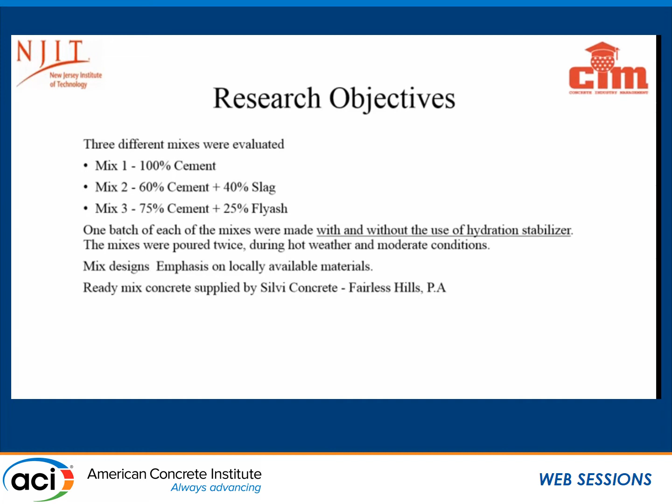So the design was based on locally available materials. Here you have a picture of the batching plant at Silvi. One of the reasons we chose to do a mix at the batching plant is that if we do an actual site mix, it'll give more credibility and more realistic results as opposed to doing a mixture inside of the lab.

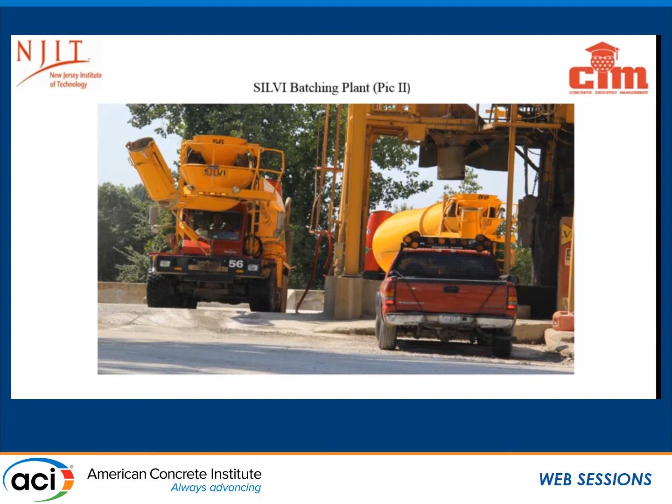A lab mix is always going to give you quote-unquote perfect results. Our interest is in what is going to happen in the field, because what happens in the field determines a lot, and the outcome of your concrete is what affects the concrete's performance. So we chose to do an actual field mix at an actual batch plant.

These are some of the tests that were done. We decided on doing timestamps of 60, 90, 120, 150, and 180 minutes to determine the effects and the performance of the concrete at those individual time frames.

Typical tests: slump, entrainment, temperature, compressive strength, flexural, permeability. In terms of the actual tests normally done on fresh concrete, we pretty much incorporated all of them so that we could have an array of results to present.

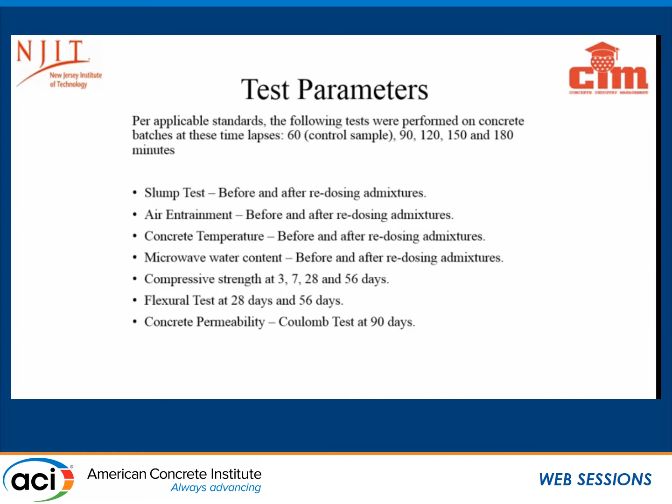Target properties, again, nothing strange or unfamiliar: 28-day compressive strength, which is industry standard, max aggregate size of 1 inch, target slump, target air, hot weather conditions, moderate weather conditions, and your typical specimen sizes - your 4x8 cylinders for compressive strength, your 6x6x18, and your 4x4x12 for flexural strength.

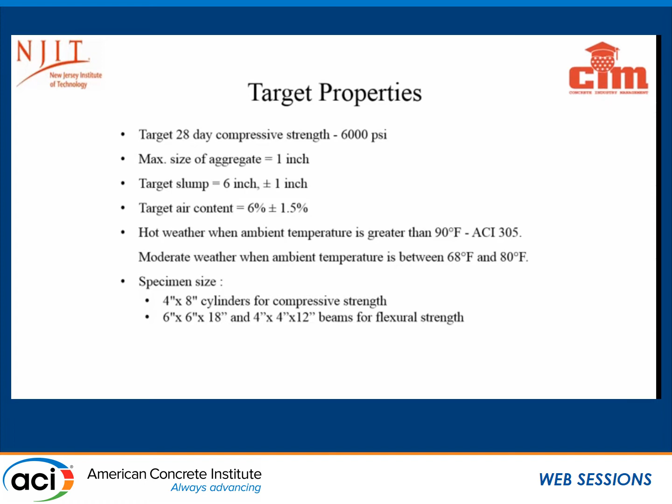Quality control, of course, is imperative. We made the determination very early that the only interference, the only adjustments we'll make, is with the high range water reducer and the air entrainment. No water addition whatsoever would go into these mixes, because if you add water, you change the water-cement ratio, and you could have further challenges that we want to minimize or avoid. We utilized quality control reps from the supplier, and Sika admixtures were on board with us, supplying representatives as well to provide guidance.

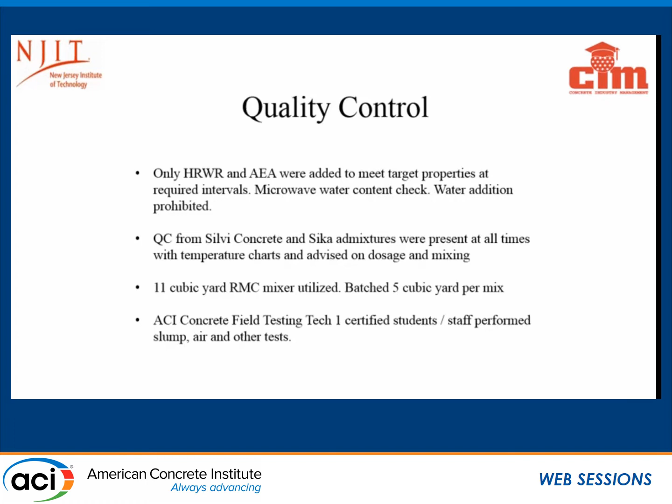Like I said, we used the actual ready-mix plant and actual ready-mix truck, because we wanted to make it as realistic as possible, so that it could be quite comparative. And of course, we used certified students and staff to perform the tests.

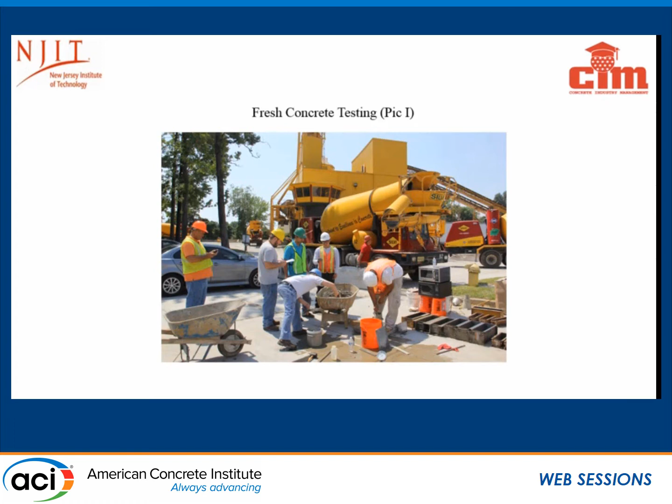Here we have the fresh concrete being tested - taking your samples, making your slump. You have your typical air pot, your temperature gauge - everything representative of what goes on site in terms of testing concrete. One of the things we did was a microwave test for moisture content.

So, the expected research outcome was pretty much to determine that there's no loss in performance of the mixes when going beyond 90 minutes. One of the things determined to be used was hydration stabilizer, because it has been proven that hydration stabilizers and retarders help the concrete perform in the intended way when going beyond 90 minutes.

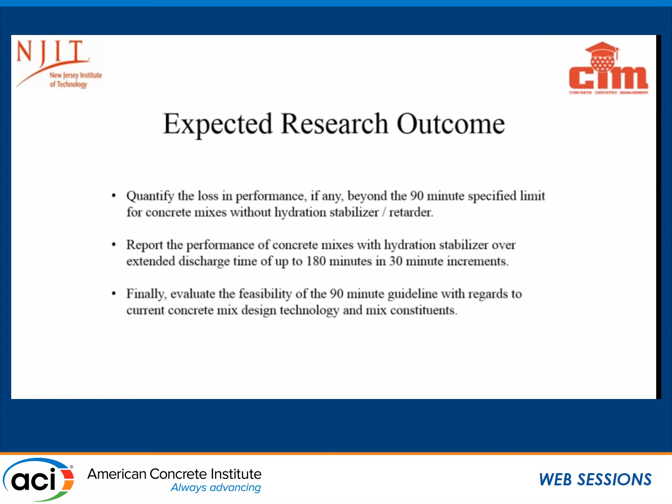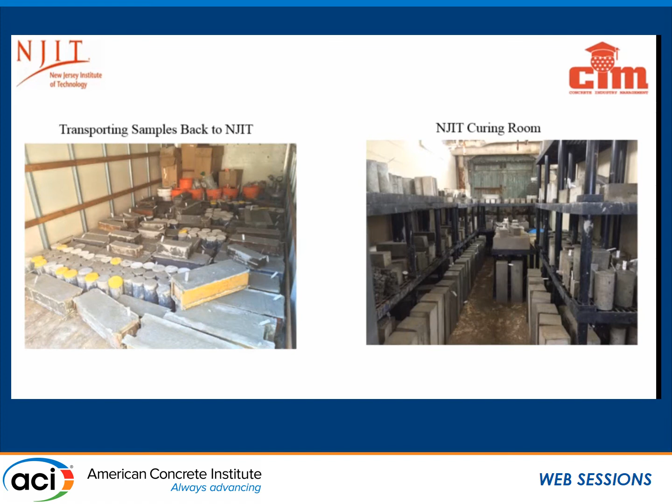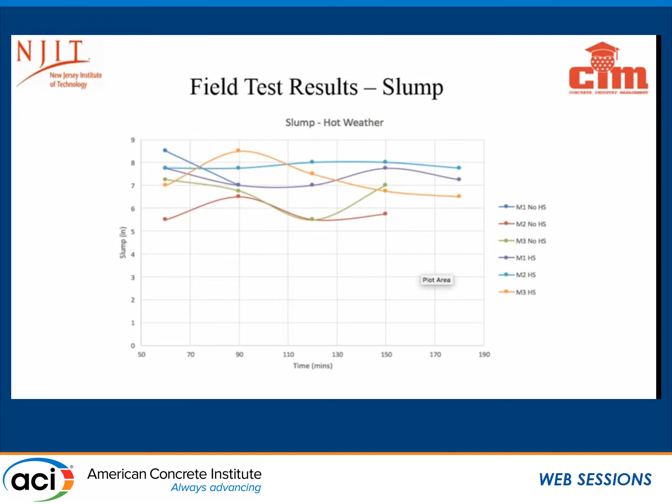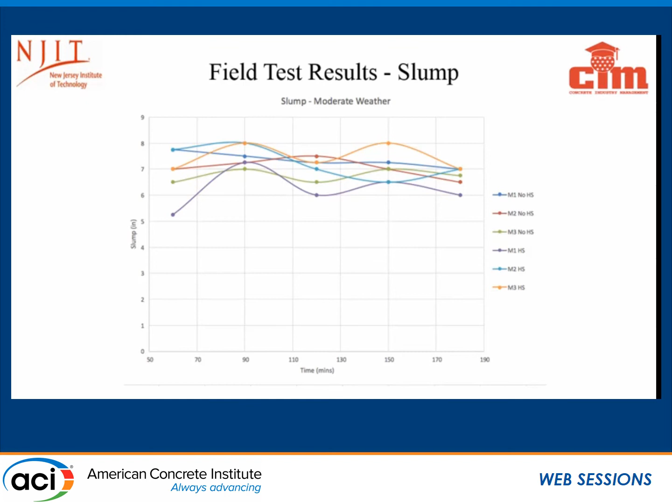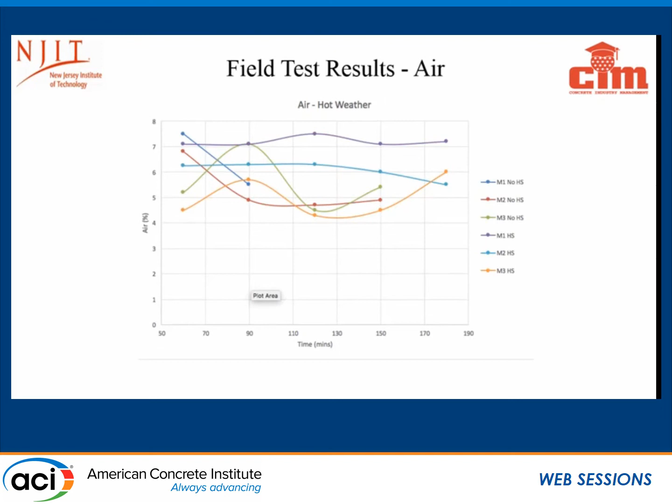Air is a major concern because as the mix is extended, you can have a loss in air. At each interval, when we tested the mix in 30 minutes, we checked slump and air. In some instances, we had to retemper with both the high-range water reducer and the air entrainment. But generally, the air was fairly consistent when you use hydration stabilizer. It's continued proof that utilizing admixtures is pretty much what's going to guarantee or assist you in achieving these results. Air entrainment during moderate weather is even more consistent compared to some of the mixes. It's a little erratic during hot weather, but in moderate weather it's more stable.

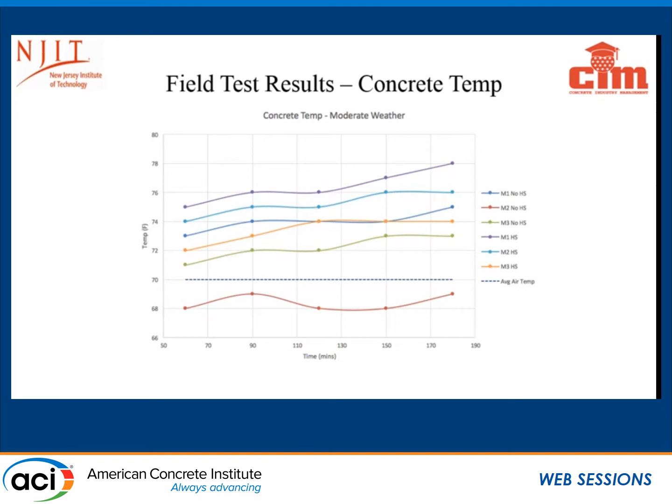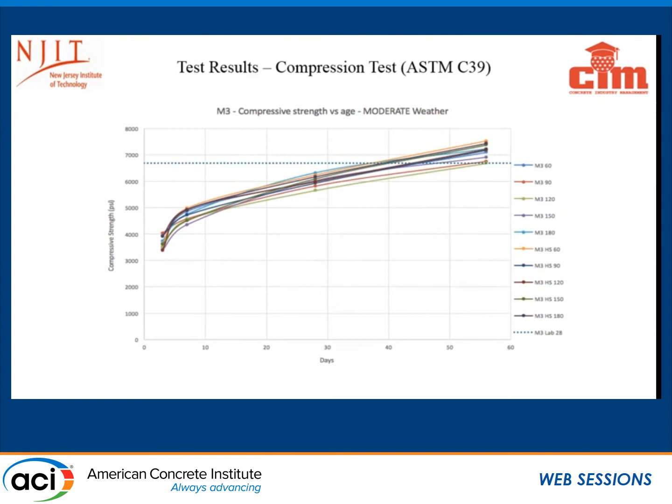Mix two, in moderate weather, you're still hitting your target. Mix three, in moderate weather, hitting your target.

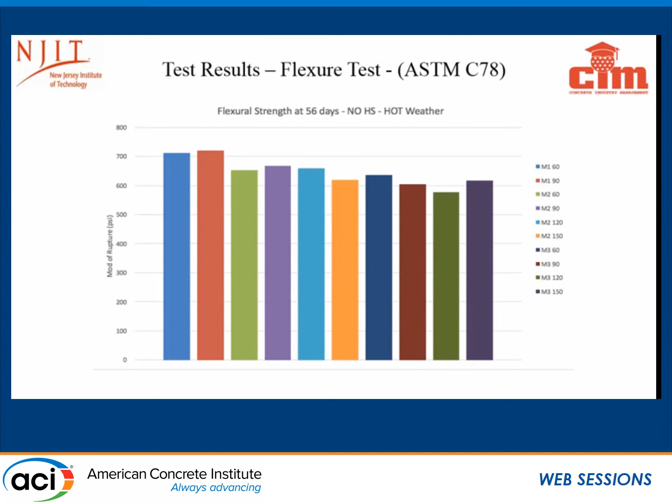One of the other tests done was flexural strength. I want to focus a little bit more on mix two. Mix two and mix three, the ones with fly ash and slag, show the most promise in terms of consistency and maintaining all the different characteristics that we're hoping for. So you have a range, mix two ranges from here, this one is a flexural test to here. You see it's fairly consistent over the testing period of 60 minutes down to 150 minutes.

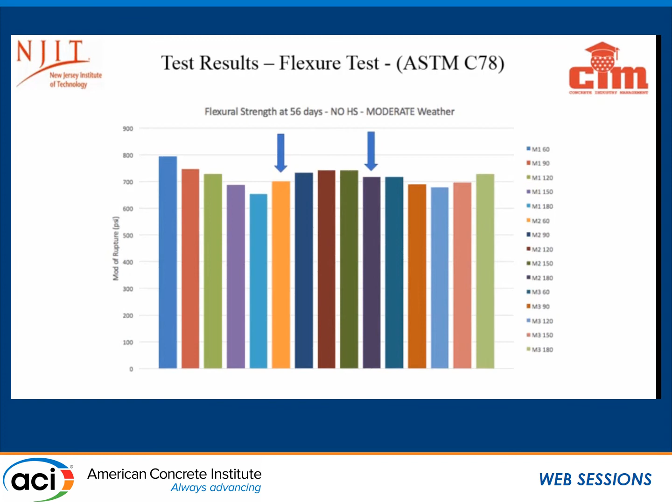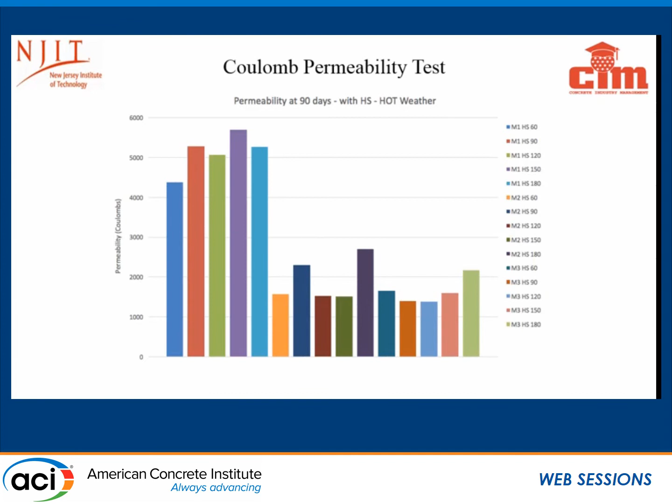You have your permeability test. As you can see, reduced permeability when you incorporate these supplemental cementitious materials. Same thing here, 90 days in hot weather with hydration stabilizer, you have the results between it. Again, fairly consistent. This one is 90 days in moderate weather with hydration stabilizer.

So that was the last of the charts. Now the summary of the findings: as expected, the summer pour's workability was not going to be as long as in moderate temperature. We pretty much had to redose with stabilizer and high-range water reducer at about every half an hour. In the case of the 100% Portland cement, we actually did it twice to get a more average result and to determine the effects again.

The slag and fly ash mixes were workable up to 150 minutes. The 100% cement was not so much - it started setting up much earlier. All of the mixes used our 60-minute sample as the control. The 100% cement was workable up to 100 minutes, after that it started setting off. The slag and fly ash were workable enough up to about 150 minutes.

And this was no water whatsoever - no water was added. What do you redose at here? High-range water reducer, Super P. The only addition we made to any of the mixes at any time were air entrainment admixture and Super P. I've got a question.

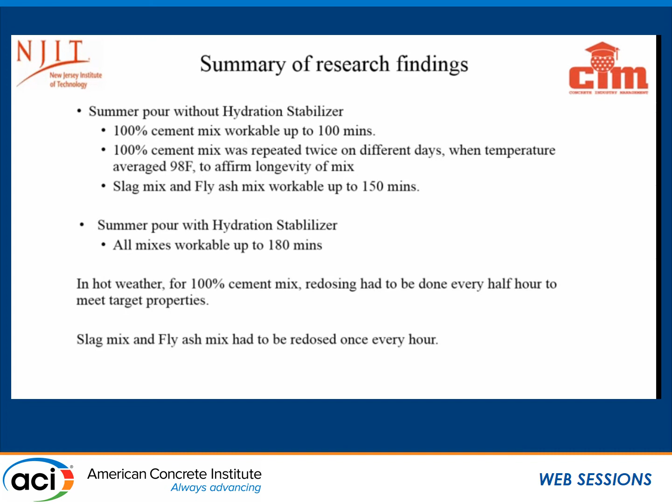This slide is a continuation of a summary of the findings. The fall pour without a hydration stabilizer, compared to during the summer, we were only able to get up to 100 minutes on the 100% OPC. We were able to get up to 180 minutes without hydration stabilizer in moderate weather. I don't know if that answers some of your questions.

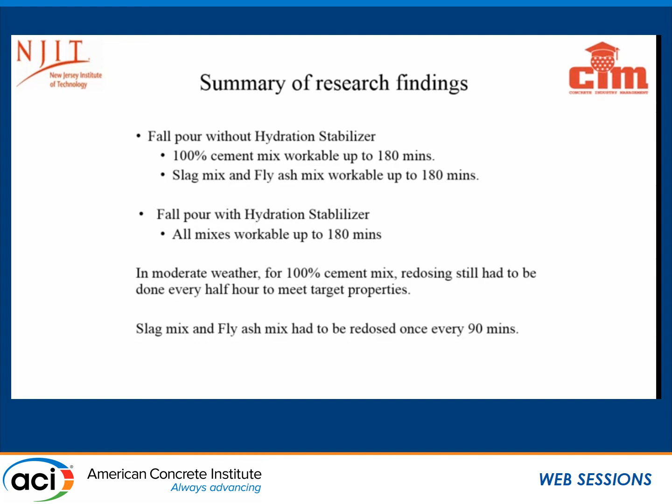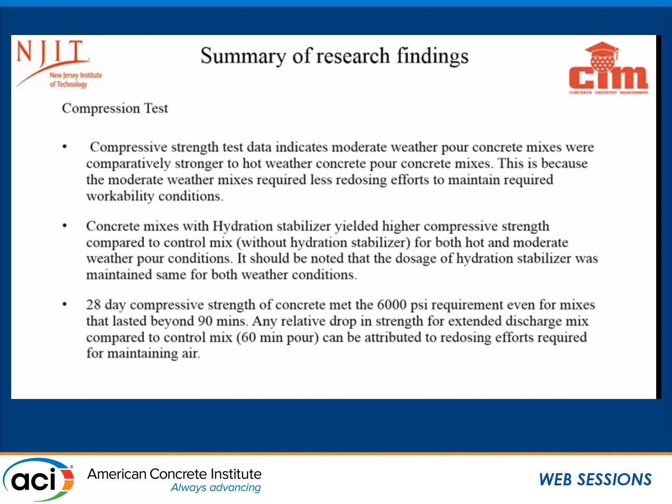Fall pour with hydration stabilizer, all the mixes were able to achieve good workability up to 180 minutes. The compressive strength, again, we are able to hit our targets where compressive strength is our concern. The mixes with hydration stabilizers yielded higher strengths regardless of atmospheric conditions. Flexure test data shows the concrete mixes were stronger during moderate weather, which we didn't quite expect, but is what the outcome was.

And that with a hydration stabilizer - I think you asked the question about the control mix. The 60-minute sample is the control. Flexural strength was about target 10-11% of your compressive strength at pretty much all the discharge times.

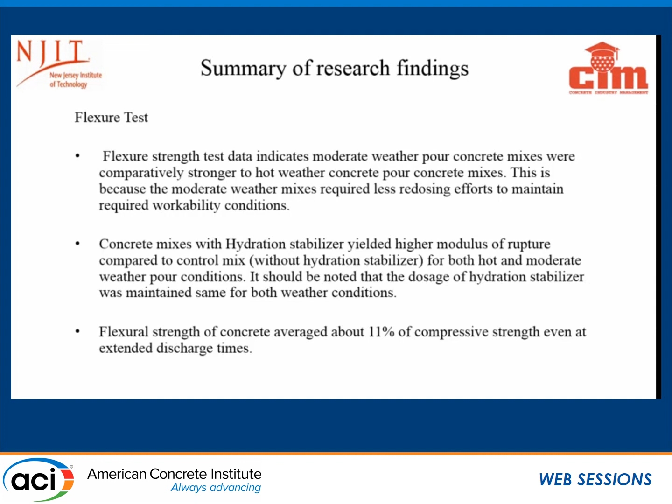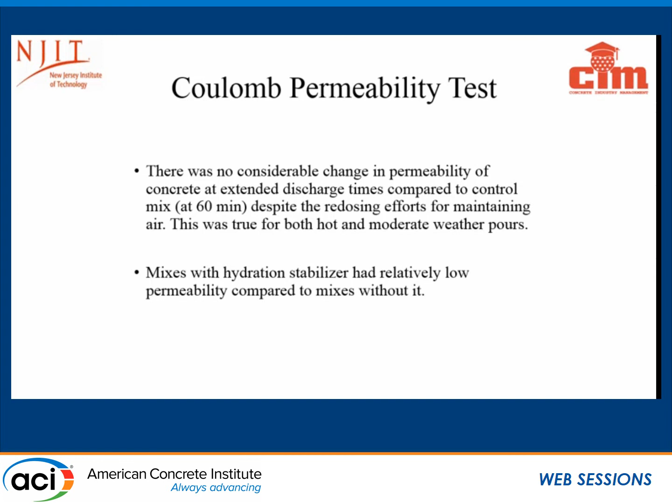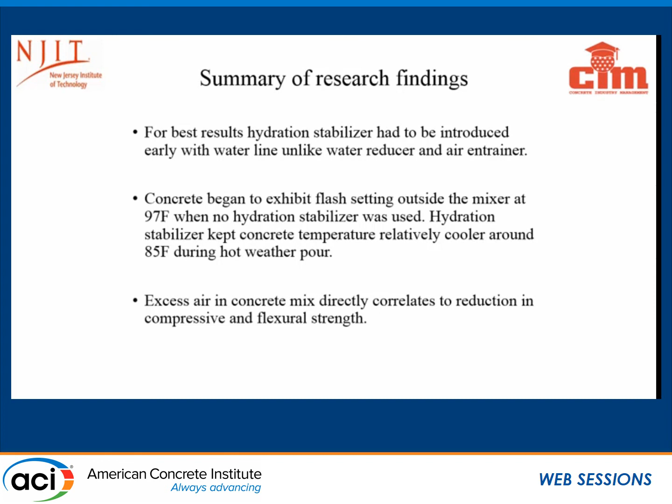Permeability, as you can see in the previous charts, was good. It was not affected, and was within acceptable ranges. The ones with a hydration stabilizer had slightly lower permeability results. The mixes without hydration stabilizers started setting up pretty early, while the ones with the hydration stabilizer gave us extended times, and this last one extended even further. We had to redose with air entrainment on a couple occasions.

Okay, so that brings me to the end. Thank you for a thoughtful presentation - it was very, very well done.

For those in the back of the room, I'm curious about the initial setting characteristics of concrete versus the wear-off of superplasticizers. They're the same, but they're very, very different. You don't have any real data except for temperature increase to know which is occurring.

In your research, could a redose of a hydration control stabilizer be done once the material has gained strength, or is that not possible? It pretty much will not have much of a positive effect after it's already started setting up. Its initial invention and creation was done to return old concrete back and reuse it.

Its effectiveness is not good once the chemical reaction begins, is that correct? Exactly. Which is why you have to utilize that mixture to slow it down or prevent it from getting there sooner.

Very good. Aside from temperature rise, is there any other indicator that we're having the initial setting characteristics rather than, as you said, the hydration control or superplasticizer effect tending to wear off in 45 minutes, regardless of conditions? Modern technology and chemistry is improving the performance of high-range water reducers, so it's about 45 minutes now, give or take. Previously, it was even less.